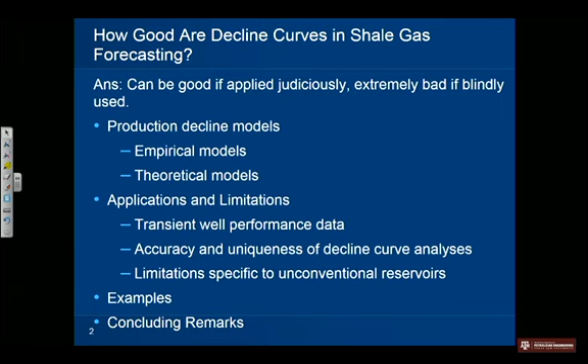One thing to note, and this is true of any kind of numerical inversion on any kind of historical data: you cannot invert for a parameter in which the effect of that parameter has not been exhibited in the record. So if you have a parameter such as drainage area, and all you have is transient data, the effect of that parameter has never been exhibited in the production performance. You cannot invert for that parameter directly.

You can estimate it—there's various techniques for extrapolating or estimating what that parameter is, but you cannot directly invert for it. So if you take that production data and hook it up to a model, a decline curve analysis model, with a nonlinear regression engine such as Levenberg-Marquardt or any other regression model, it'll give you any kind of wild answer you want. There's no uniqueness to it whatsoever.

But you can do some judicious extrapolation techniques, Cartesian extrapolation techniques, to estimate what those properties are. There are specialized techniques for that. There's also a bias when you look at empirical models—you're trying to fit it to some kind of general shape that you're looking for. Those parameters may have essentially no fundamental basis in the reservoir properties.

So when you do an empirical decline curve analysis, you get a B value and you get a decline rate value, or a D value. You have to try to relate those to some fundamental properties such as permeability, fracture half-length, drainage area, skin effect, or any of these other parameters. There are ways to estimate it, but it's not really a direct one-to-one correlation between some of those parameters. There are techniques you can use to try to estimate some of those.

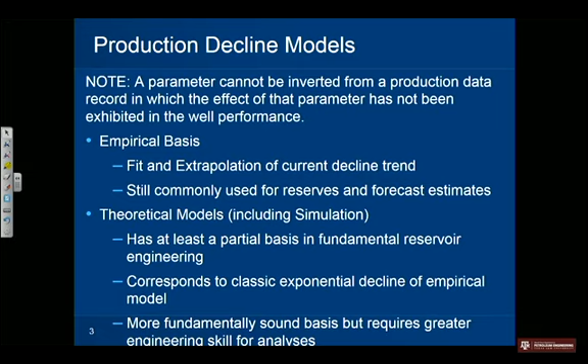All right, let's talk about the applications and limitations. The applications: any reservoir that produces fluids under natural flow, or if you have measured bottom hole pressures so you don't have to calculate them from the surface. If you have PWF values from something like an ESP, you can do a production decline curve analysis.

The limitations are that generally the quality or quantity of the data may be a limiting factor. At best we're hopefully getting daily data; sometimes the best you can get is monthly data. The coarseness of the time increment you're using really hinders what you can actually extract from the production performance. But ideally, the best data you can get is as small a time increment as possible—daily data is better, hourly data is better.

The uniqueness you have for inverse solutions or match results—this is particularly true when all you have is transient data—there are multiple realizations you can get for those types of data sets. But there are techniques you can use to improve that, and I'll show you some of those here in just a minute, based on some work we've done earlier.

Talk about the accuracy as well. There's also some graphical analyses we can use for improving the match parameter selection.

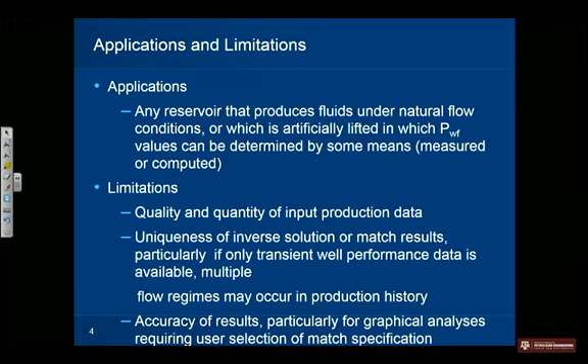The rate transient analysis dimensionless variables are given here. This is the definition of dimensionless wellbore flow rate in oil field units for liquid flow, corresponding gas dimensionless wellbore flow rate for gas reservoirs, in conventional oil field units. The dimensionless time and the dimensionless cumulative production for liquid and gas in oil field units. That's the rate transient analysis variables.

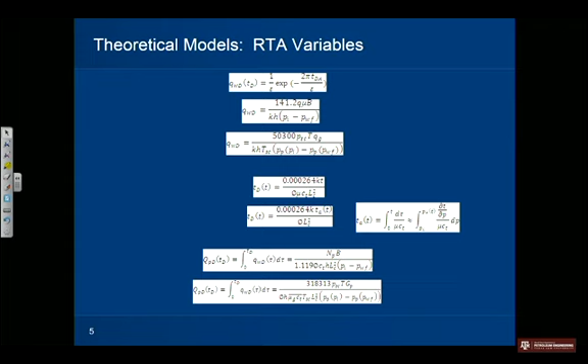Here is the decline curve analysis variables and how they're related to the rate transient. This is the dimensionless decline curve variable, time value. If you look at the Fetkovich decline curve, this is the kind of parameter he's plotting, where he's coupled the transient stems and the late time Arps stems.

He's got a dimensionless time parameter on the abscissa. On the ordinate axis, he's using the dimensionless rate, dimensionless decline rate, and how it would be related to the exponential decline. This B value of 0.

Dimensionless cumulative production, this is an integration of that variable, as well as an integral function that Tom and some of his coworkers have developed, an integral function and a derivative of that integral function. These help you in determining some of the early transient matches.

Because it gives you three curves to match on simultaneously instead of just one, it helps remove some of the uniqueness issues with early transient parameters.

One thing I like to work with too is a dimensionless pseudo production time, like a dimensionless Horner time or dimensionless material balance time. Essentially it's the dimensionless cumulative decline production divided by the dimensionless decline rate. That's issued here, or here it is in terms of the material balance time function and the drainage area, dimensionless drainage area. So they're all interrelated.

It depends on how you set it up as to what you can extract, what groups of parameters you can extract from the decline curve analysis match.

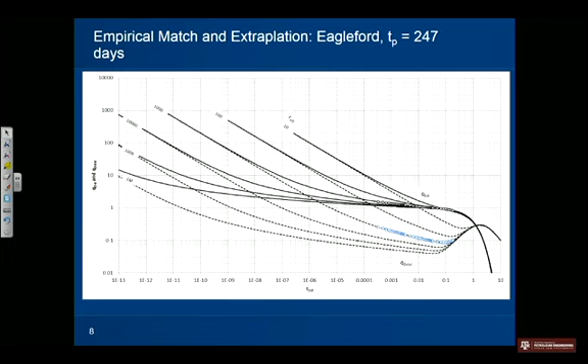We can also do a more theoretical based decline analysis match. This is like one of Tom's plotting functions. Here we have dimensionless rate and also the integral derivative function versus dimensionless decline time.

You just change the slide with your finger. Did I touch it? Yeah, let me go back one. Does it automatically advance? You just touch it? Yeah, it's live. You can do just about anything with your finger, so be careful.

What I have here is you can take the same rate decline data and plot it like this, or you can plot it in terms of dimensionless cumulative production, which is the next slide.

This is an Eagleford well that will actually flow prior to production, or prior to fracturing. Here I have 247 days, but it would actually flow before we fracked it, right? We can match that on basically any set of these early transient stems, any pair of them. They're all symmetric - that's the uniqueness issue we run into many times. We don't really have any data on the late time part of the curve.

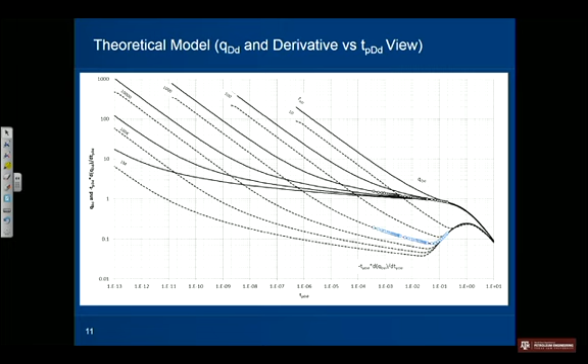We can also look at the same data plotted up. This time we're plotting it against the material balance time function, dimensionless material balance time, or dimensionless pseudo production time function. It's the same data, and I also threw on a well testing type derivative right here, so you can do all kinds of combination of matches. In fact, there's even more exotic stuff that I'll show you we've looked at.

So we'd model a tight, low permeability formation. Basically, what you're draining is the length of the horizontal lateral or the fracture. You get very little, if any, production from beyond that length. In a conventional reservoir, you will get some, but in an unconventional or tight reservoir, very little production comes from beyond the length of the linear source. We model it, we can verify that fact as well.

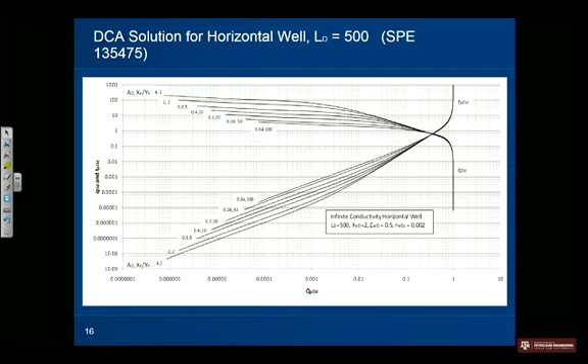You also have dimensionless drainage area and aspect ratio as well. Here you have a family of curves. This is the DCA solution, here we're looking at a different set of values. We're at a high or large value of dimensionless wellbore length, and here we're looking at a low value—this is 50, the other one was 500. So you can see the difference in the shapes of the curves.

All right, here's some exotic curves. You can throw together all kinds of plotting functions that you want to. We can actually generate unique derivative functions.

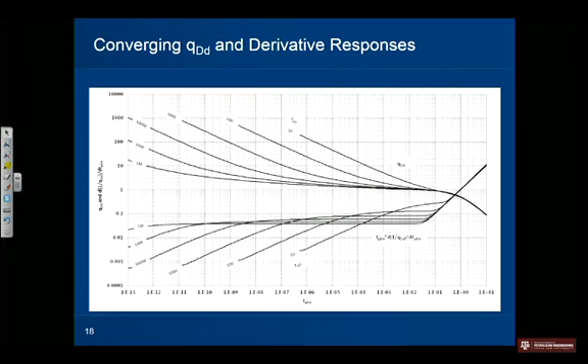We can also look at multiple fracs, horizontal wells intersecting multiple transverse fractures. This is commonly what all of our completions are in North America now. In fact, we do this on a daily basis. We have interpretation models we use regularly where we can look at quantitative diagnostics.

We look at linear flow, compound linear flow—these are the different flow regimes we'll point out here. You can also look at multi-rate or multi-flowing bottom hole pressure forecasts, so you can have a changing bottom hole pressure forecast in it. You can couple it to nodal analysis. In fact, I think it's on one of the slides coming up in a minute.

You can look at desorption of the shale. Of course, for gas reservoirs, you have to use pseudotime and pseudopressure—pseudopressure for sure, pseudotime if you're looking at boundary-dominated data. As long as it's pretty transient, you can get by with just pseudopressures. It is a very fast semi-analytic solution.

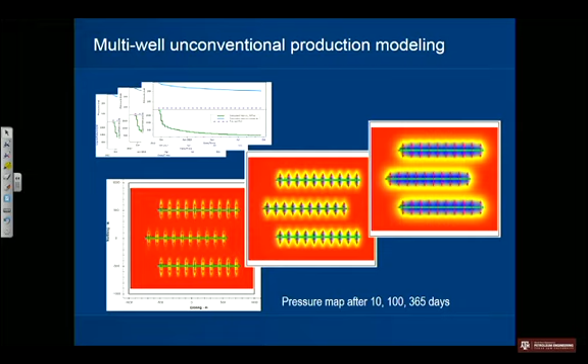All right, this is an example in Eagle Ford in South Texas. This is a real field example. This is a horizontal well with multiple transverse fractures. This is the kind of production history you see.

Your gas rate comes on initially at about 10 million a day, and after 500 days of data, it's down to about 900 MCF per day. You see the water production is drying up. There's very little condensate - it's negligible. This is basically a gas well.

But this is basically the flowback from the fracture. The first 100 or so, 150 days, this is frac water. Because after about 150 days, you're down to about 12, 13 barrels a day. It's not much. All right.

This is another type of diagnostic we can do. This is just plotting up the raw production data, nothing fancy. We have the pressures, we also have the rate. The pressures are computed from the surface - we have surface flowing pressures and flow rates. We calculate bottom hole pressures and convert them to pseudo pressures.

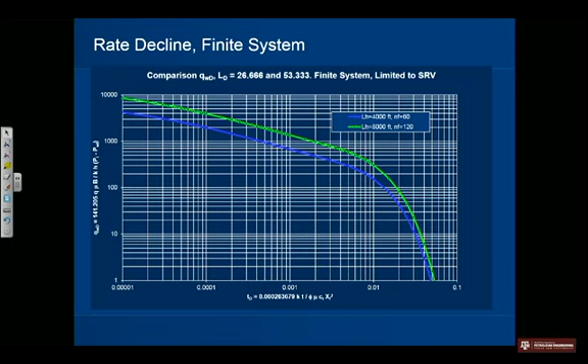The next slide - here we've already gotten past the SRV region. This is the end of the SRV region right here. Here we're pulling fluid from beyond the SRV region, outside of where the length of the fractures are and the length of the lateral that has the fractures in it. Actually, you're pulling fluid from far field in the reservoir.

You don't have the EUR of these wells? No, I don't, this is synthetic data. I can go back and figure out what it is - I look at the simulation runs, but I don't know what the number is. But it's a synthetic example. We were looking at the question of what was the effect of increasing SRV, putting more fractures in it, making a longer fractured well. And so theoretically, yes, it increases the production.

So, I didn't want to put a whole lot of slides there, didn't want to take up all y'all's time. But fundamentally, as I said earlier, if you've got a parameter that you're trying to invert, you cannot directly invert it, but you can estimate what it is many times using specialized diagnostics. But directly, you cannot invert that parameter if it's not exhibited in the production performance using a typical or classic inverse analyses.

The production behavior can be used to evaluate reasonably reliable or accurate estimates of reservoir and fracture properties, or well properties, depletion effectiveness using rate transient, decline curve analyses, and specialized diagnostics. You really need to use every kind of analysis you've got, not focus on just one type of production analysis. You've got DCA, you've got RTA, you've got any kind of numerical model matching, diagnostics, everything. And you'll get probably the most reliable and best answer you can get with it.

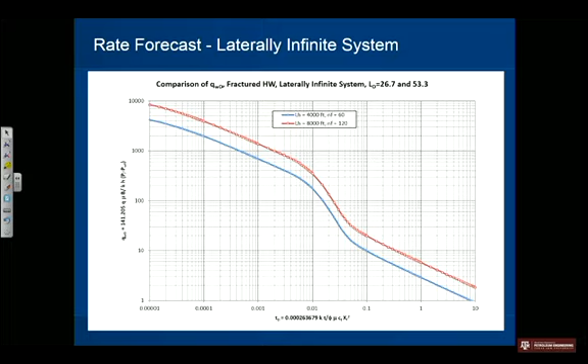If that well ever gets to the boundary side data... For example, here you estimated 16.4 acres drainage area with transient data. If you wait several years, have you ever checked that? This one, I know what the answer is because I used it to forecast it. The production is forecast—it's synthetic. So we know it works because this is forecasted.

The input values were 950, frac length. Permeability is 10 to the minus 3 millidarcies, and it's right at 16 acres. But those data are transient only. Yeah, but we can estimate what the drainage area is with only transient data. This is a synthetic example, so I know what the answer is. With field data, you don't know—unless you run it clear into late time, you would never know until you actually see late time behavior. But here we know what the answer is to start with.

We know these are the input values, or right at the input values. Now we have the transient data, we can extrapolate it. See, there's only one place in this whole graph set where the data will fit. I was asking if you had the chance of having, from the same well after some years, boundary data where you can invert those parameters. It'll give you the match.

In fact, let me show you something here. Let me get out of this, escape. Here we go. Oh, I don't have my machine here. No, I've got the spreadsheet on my program, on my computer. I don't think it's on the stick, the memory stick.

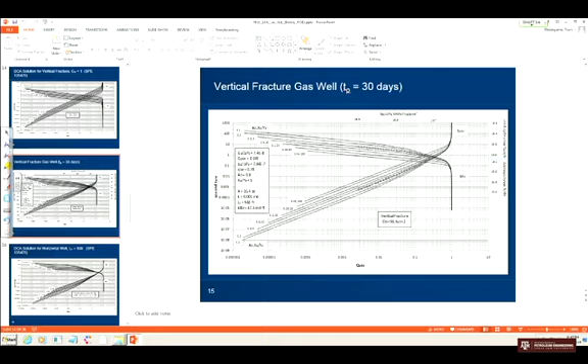You do this matching in an Excel spreadsheet? No, I built a prototype, a demonstration prototype, in Excel. This is all Excel right here, but I have a program where you can move it on one graph. All these graphs are tied together—you move it, and it'll simultaneously update all of them. All these different types of analyses I've shown you, like these types of graphs, it has all these built into it. It has all these different matching functions hooked up simultaneously. You move it on one graph, and it'll automatically update all of them.

And so you match it simultaneously. This is the one I use to do most of the matching—right here, that gives you the anchor point, the QPD value. Once you have it, like almost 0.02, 0.15 or something like that—once you have that, you know where to put it on here, right? You know where that match point is, then you know which pair to pick up. That removes the non-uniqueness problem.

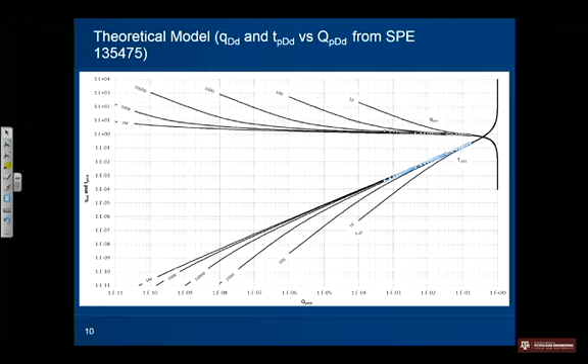All you have is transient data. Okay, because on this graph, the cume graph, as well as—it also is a time graph—you can basically match on any pair of symmetric data if all you have is transient data. With this other graph, there's only one spot it'll fit.

I want to give these guys a little context. Why are we doing production analysis rather than pressure transient analysis? Well, one real good reason is rate transient analysis is basically a constant or terminal pressure solution. Somewhere in that system you've got a terminal pressure, whether it's constant bottom hole pressure, constant wellhead pressure, or separator back pressure—somewhere that terminal pressure governs that inner boundary condition, that outflow. If nothing else, it's stock tank, the atmospheric pressure at the stock tank. Somewhere in that system you've got a terminal pressure.

So ideally, we have rate data as a function of time, so we can do our rate transient analyses. Decline curve analyses fall in that same category. Well testing, where you can actually shut the rate to zero, is ideal for using pressure transient solutions, because then that's one of the solutions—you can actually shut it down to a rate of zero. With rate transient solutions, you can't really shut them down to zero. You can bring the pressure up close to whatever the average reservoir pressure is at that time, and it'll go approximately to zero. But with well testing, you could actually set it to zero, shut in at a rate of zero.

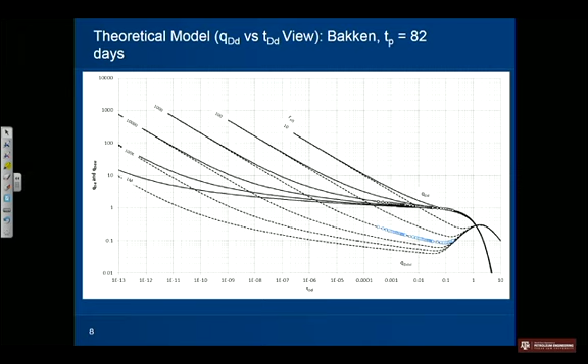He's not talking about superimposing it, Santiago. He's talking about, like in PETE 620, when you had a solution you had to derive it for either constant rate or constant pressure. When you get to this, it's a constant pressure - all the type curves that we generate here are like constant bottom hole pressure type curves, right, rate transient type curves. But when you get to these models, all you have to do is apply superposition, and you can use that same solution to generate this kind of response.

Here you have the rate and the pressure. This is the inner boundary condition we're using to drive it, a decreasing bottom hole pressure function like that. If you do the nodal analysis, where you have terminal wellhead pressure, you're just doing the intersection between the inflow and outflow curves in the nodal system analysis. It's using the same type of constant bottom hole pressure solutions to do it.

So what's next, Bob? What's missing in the literature that we need? As you and I come to the end of our careers, what's our bucket list of things we'd like to see happen? There's a lot of things to be worked on.

One of the big ones, of course, is being able to calculate - I'd like to be able to calculate inflow along a long lateral. You have a horizontal well with multiple fractures, or even unfractured, it doesn't matter. You have some fractured, some unfractured. You'd like to know what parts of that wellbore are contributing to production. You have to be able to compute it some way. You have to have the rate distribution somewhere along that system to go with the pressures that you have at the wellbore.

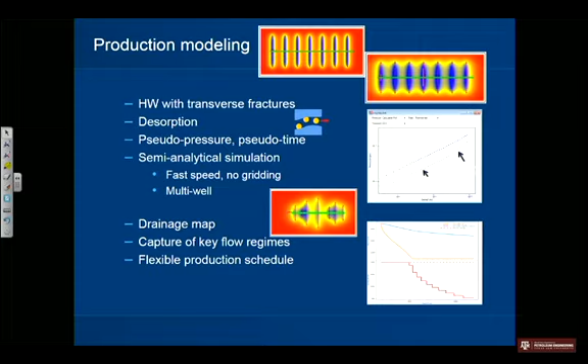We don't take into account any of the relative permeability changes with time. You saw these changes. I mean, here they were... oh, I'm sorry, wrong way. How much change in, one more slide. How much change have we had in all the permeabilities?

About 4.5, less than 0.5 on the water. Condensate didn't change much, this is basically a dry gas well. You get that much kind of change in water production. So when you're calculating a multi-phase pseudo-pressure function coupled with these analytic models, we're not accounting for this.

That's the subject of some work that I've got, a paper coming into the Amsterdam meeting that'll be covering some of this. In order to do that, you've got to actually start out with independent measurements of relative permeabilities. There are capillary pressures that you can use to calculate relative permeabilities from.

So I have some work that I was doing in the Bakken. I have mercury injection data, capillary pressure data. You can use Burdine's model to calculate the corresponding relative permeabilities, plug those into a multi-phase pseudo-pressure integral transformation. You can calculate a multi-phase pseudo-pressure function that you can use to analyze this type of data properly without ignoring all these multi-phase effects. It has both capillary pressures in it as well as relative permeability effects.

And it effectively linearizes the diffusive side of the diffusivity equation. Not the storage side, the diffusive side.

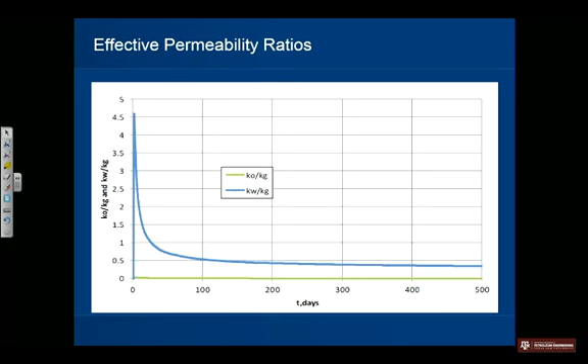You'll be telling the guys one day. I mean, we had a workshop today where we talked about the future of unconventional analyses, and the kind of things you're going to be looking at are going to be really complicated modeling. You know what happened to us in our career, Bobby, with really complicated modeling? It just didn't - it doesn't. It's not justified.

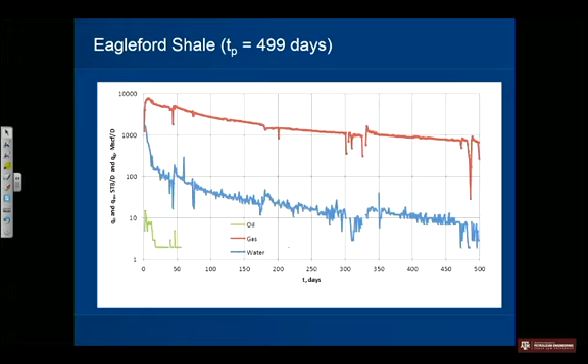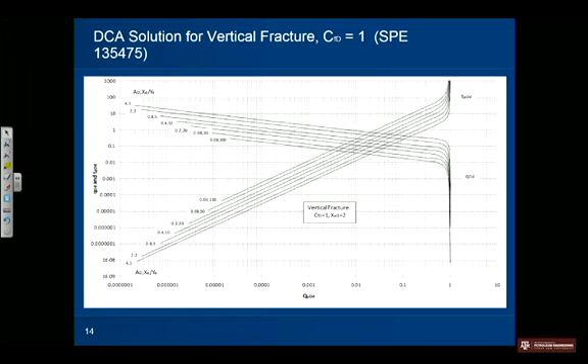One final comment: using Tom's technique of calculating the coupling point, where all your late time stems collapse to a single exponential decline stem, like in this expression right here, gives you the anchor for these theoretical decline curve solutions.

If you can generate, whether with Eclipse or whatever model you want to use, analytic solutions, numerical finite difference models, whatever, the rate transient history of any kind of well configuration, whether it's multiple laterals in all different directions, curlicues, whatever, you can generate that rate transient history and convert it to decline curves. You can do this type of analysis. You just have to be able to generate that solution and normalize it to get an exponential decline in late time using these type of time functions.

You guys, I know you look at this stuff. This is a survey class, intended to give you background on everything. You look at that, and Bobby, we were grossly intimidated by this, right? And you derived all that. You did a lot of this. That's my point. I was where you are 30 years ago.

In fact, you introduced these two functions right here. We needed something, like he said, a tool to analyze rough data. So that was where the integral came from. Then we needed a derivative of that as a diagnostic. All this software stuff you see, it's all hidden. But we did this stuff because we had to, we had to have a methodology. People threw stones and tomatoes and everything else at us. We got up in meetings, and now we're thought of as geniuses. We're just guys trying to figure out a problem. It was an amazing time back then.

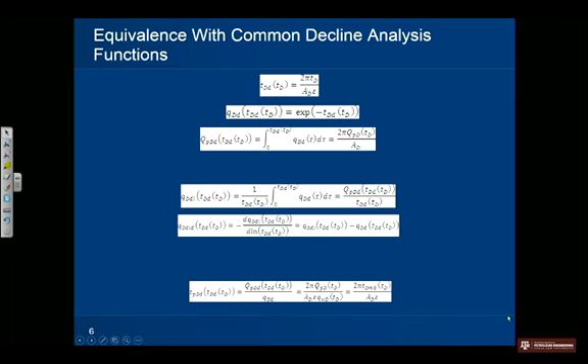Any questions? Mr. Wall... sorry, what? We met at 6. Oh, we did? Sorry. That's all right. Dr. Bennett used to go, but it'll be on the video, I'll mount it tomorrow. Mr. Wall's working on a Bakken case, right? You changed your mind? I thought you were going to work Bakken. You told me that. Did I? Did I really? What do you do? You can still do mine. What was it you were going to try to do? Oh, you're going to try to catch it.

Well, I wanted to get some kind of, there's going to be a lot better data for mine. The Bakken, they've actually got some decent data, great data for the Bakken. In fact, they've got labs set up in Denver where they actually do the mercury injection. They got the cores, they do all kinds of tests on them.

Something like in the Eagleford, there's places in Eagleford where you got API gravity of 22. Where do you think that oil is coming from? The Austin chalk above it. Where you see the fractures in the Eagleford, look in the chalk above it, it's fractured all to hell. You get API gravities of 22 out of the Eagleford. No way. All the water, salinity of the water, it's Austin water.